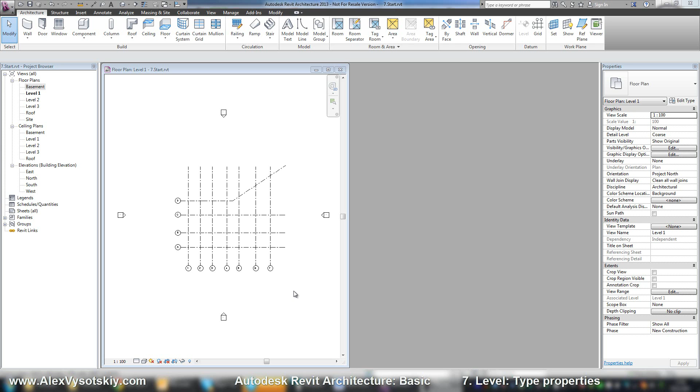Let's work with type properties of our levels. I'll go to north elevation and pick any of my levels.

In the properties we have almost the same properties. We can set line weight, color, line pattern, symbol at end1 or end2, and also elevation base, base point, survey point.

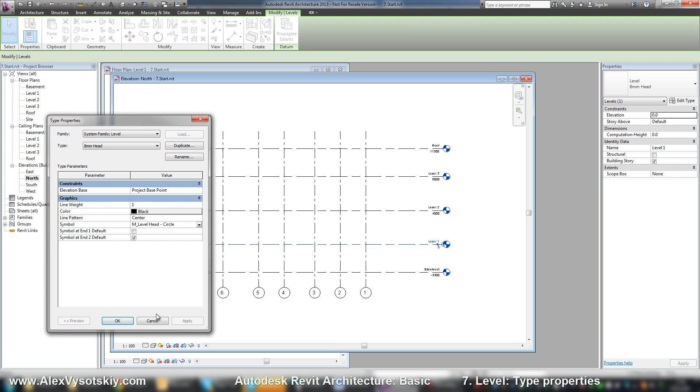And sometimes you can try to copy your level, for example, or you can copy it, you can array it, or you can create multiple copies.

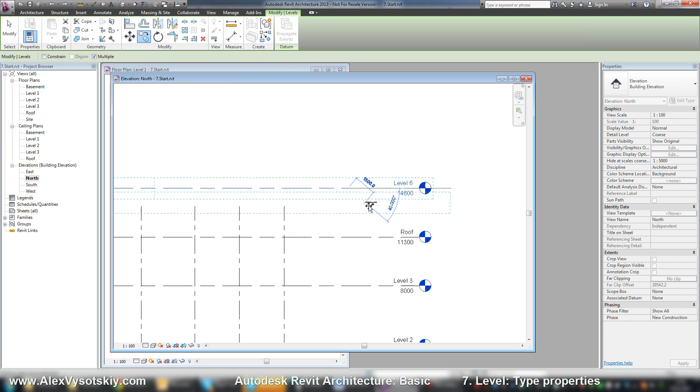And sometimes you'll receive a black label of your level, and the same way you have no level here in your project browser. What this means? This means that you have an object level, but really you have no view worked on it.

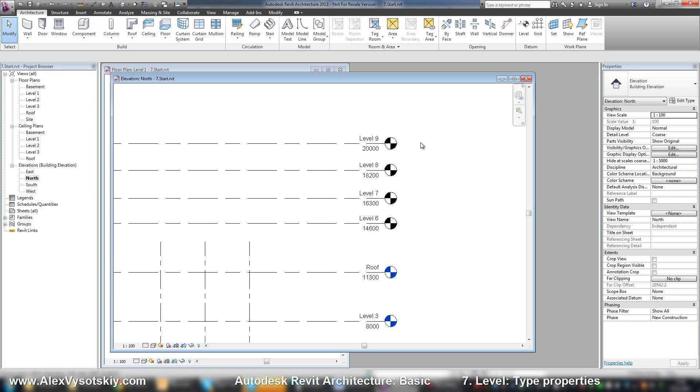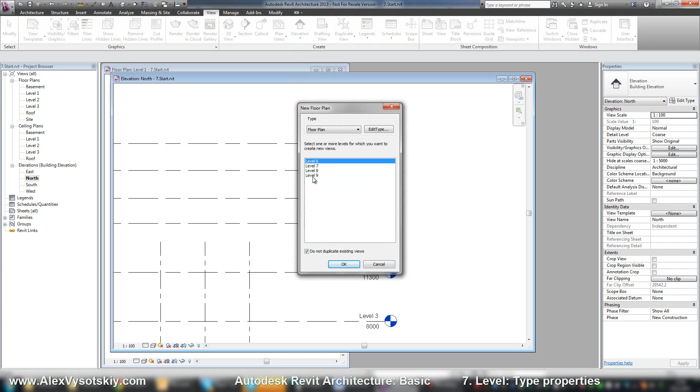So to fix this, you need to go to View tab, Plan Views, Floor Plan. Here your views without levels are presented. You can set it. You can take it all, select one, holding Shift, select the last one, and say OK.

Here it is. Now I receive my new levels, and now all levels have blue color.